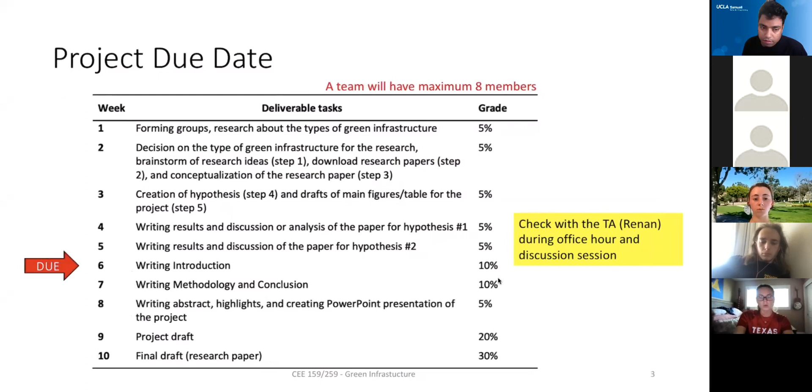All right, midterms is next week Thursday. We release it during class - there is no class, meaning you can take the midterm during class time if you want, but you can also take it Friday since it's not due until Friday midnight. Once released, you have all the time to work on it, but that doesn't mean I expect you to take that long. The exam is set for a 3 hour maximum - you just need a 3 hour window to work on it.

Example midterm - I released that last class. Check out the questions so you know what kind to expect, and we'll solve those on next Thursday for understanding. Usually everybody does well on short questions since you've taken the quiz and know the concepts. The questions you may have difficulty with are the mass balance ones, because they ask the same question a different way - you just have to know what is input and output. That's why you should solve more examples; check those two questions on the midterm to get some idea.

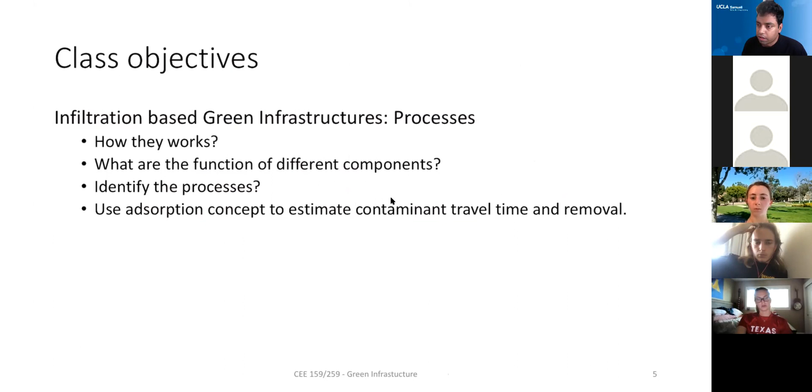This is also one of the most popular green infrastructure designs, either called rain gardens, bioinfiltration systems, or bioretention systems. These are called different names, but they all work in a similar process. Any green infrastructure where there is infiltration involves learning about the filter media.

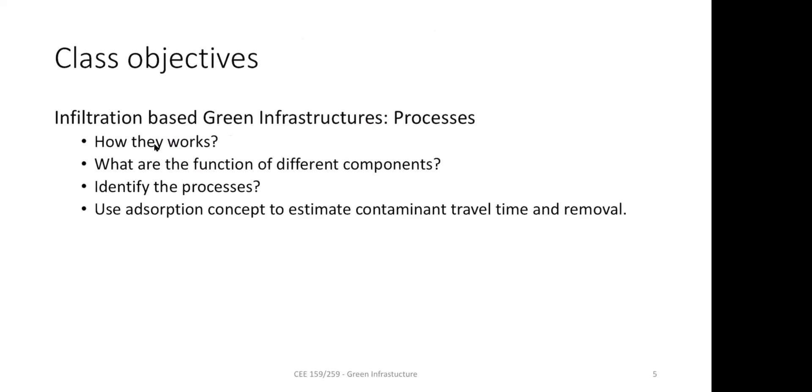Infiltration-based green infrastructures are very popular because they can remove pollutants more efficiently. But that doesn't mean you can apply infiltration-based green infrastructure everywhere. You cannot apply it where the soil itself doesn't have high infiltration, because it relies on water moving through the entire filter layer. That filtered water has to go somewhere. If the natural soil has no infiltration capacity, where will that water go? It has nowhere to go, meaning there will be no more infiltration once the soil is all soaked with water.

So infiltration-based green infrastructure requires soil with high K to recharge groundwater. If yes, then you apply it. If no, you use an under drain so you can discharge that water to the storm drain. But an under drain is expensive because you have to design extra infrastructure for it. Wherever you can't apply an under drain, you cannot use infiltration-based green infrastructure.

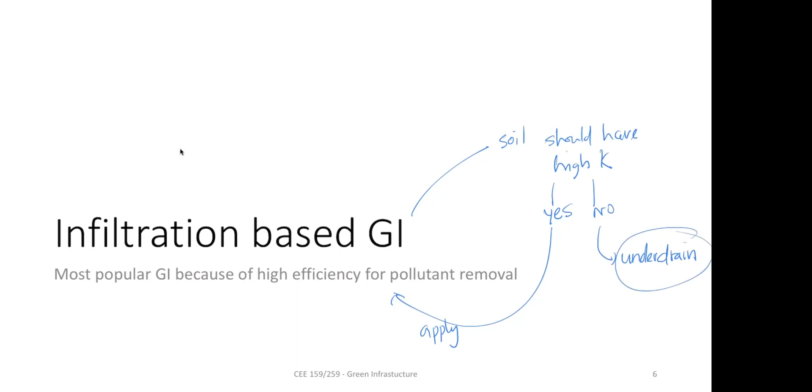So this is just one example: you replace the soil with some amount of filter media. Traditionally it's sand with a small fraction of compost. We use sand so water can infiltrate quickly, and compost is used to support plants above and also has some capacity to remove pollutants. At the very bottom, the arrow indicates infiltrated water getting into groundwater. But wherever the soil doesn't have that capacity, you create an under drain, and that water goes to a pipe somewhere you can easily discharge.

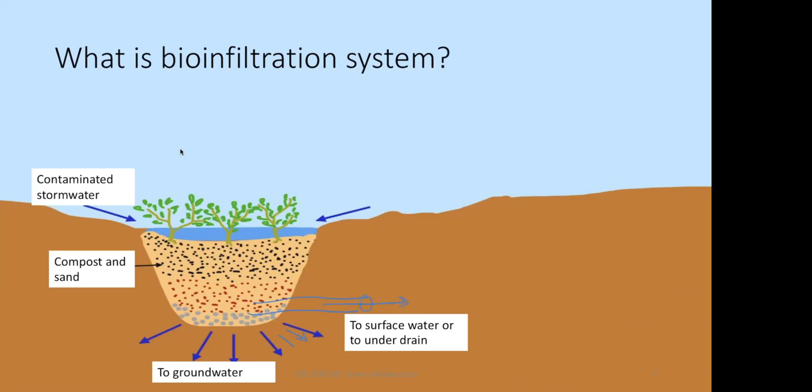One example is the rain garden—you can watch YouTube videos on how they design it. This is something you can do at a single family home. The reason is simple: you replace the soil with sand and compost, and add a liner if you don't want infiltration to occur inside the ground, or channel it elsewhere. Usually this is placed a little far from the home, because you don't want to destroy the foundation of your home—at least 5 to 10 feet far from the wall.

What usually happens is all the water that comes on the roof is channeled from the rooftop to these locations, so you don't have to irrigate. You can see this in many places—basically you can create your own garden this way.

There's another way you can check—structural systems on the roadside. You see locations with plants, like here. Water usually goes in, and there are tree boxes, but those aren't necessarily filled with that much filter media. For instance, water goes in here, and in other locations there are curb cuts so the water goes in. Many systems have these particular features.

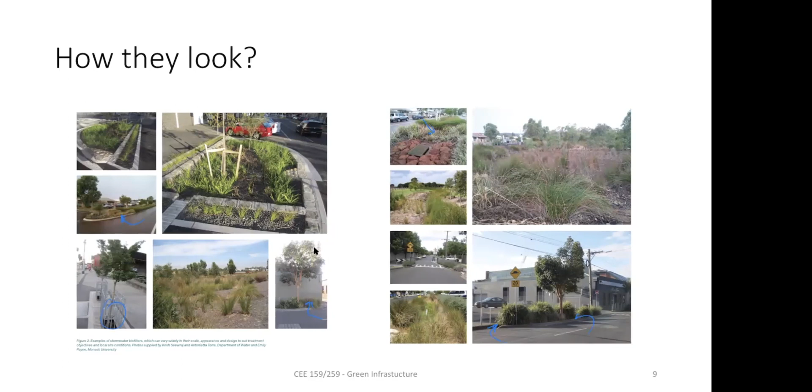But just from looking from above, you can't tell whether there's an under drain or not—90% of them don't have any under drain. That means it's assumed this is either for temporary retention of water if there's no infiltration capacity, or if there is infiltration capacity, the water gets into the ground. There are different design components you can design, but these are the four things you have to think of.

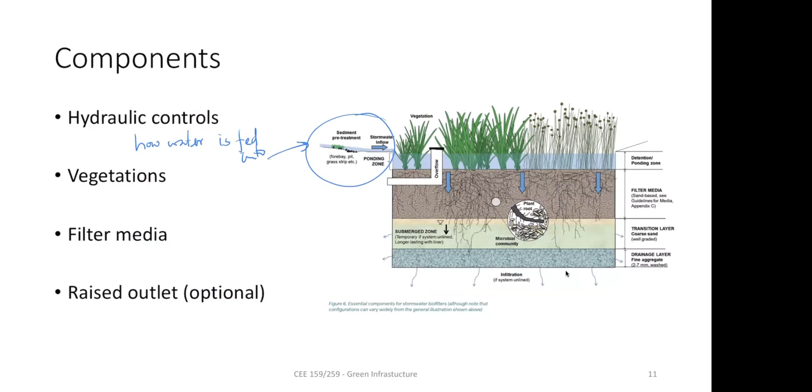Very first one is hydraulic control. Hydraulic control means how you channel all the water into the rain garden. Think of how water moves. So how water is fed into the system. There are a couple of things you can change - you can see there are some grass strips or some rocks. The idea of having those things is to slow down the water speed. Why do you need to slow down the speed? Because you want to use them as a sediment trap.

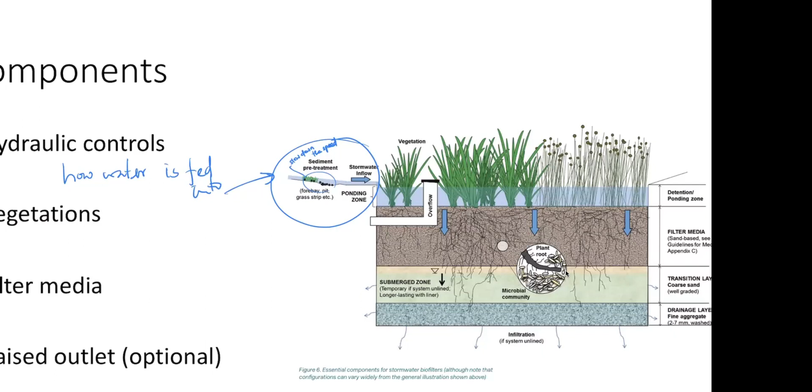If you don't use them, all the sediments will get into this bioinfiltration system and it will clog the system. So that's why there is a sediment pre-treatment. And this also slows down the water, which means you have less erosion of the actual bioinfiltration system place. So that's hydraulic control. The second is vegetation.

So that's one, the next one is vegetation - basically plant uptake of pollutants. There are different reasons for why you need vegetation. First is plant uptake. Number two, those plants are also helpful to prevent erosion of the soil filter media itself, because if you have plants with roots, they hold onto that soil strongly. So whenever there's a water flow, it doesn't erode. So that's prevent erosion.

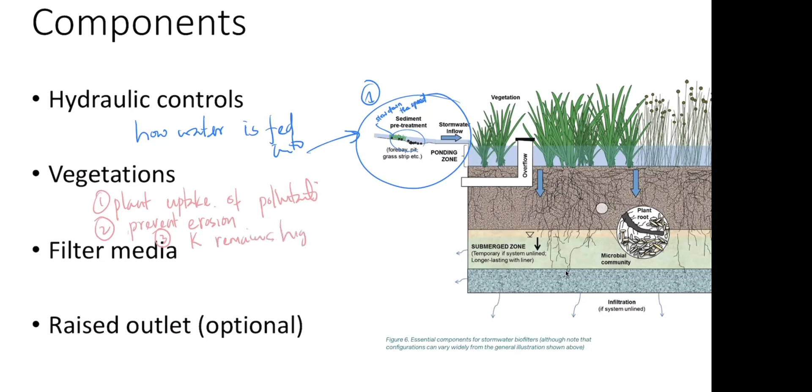And then the third benefit is if you have plants, they also increase the infiltration capacity of the soil. Because if you see these roots, the roots die and new roots grow. Everywhere there are root channels, they create a flow path - it's like a highly permeable layer where water can move through wherever roots were. So hydraulic conductivity remains high if you have plants.

The third one, which is the filter media, is this one - this is three. Filter media is the heart of this design, where you remove most of the pollutants. Usually, their goal is to increase infiltration, because you want water to move as soon as possible so that it doesn't pond. Usually within 48 hours - you don't want ponding for more than 48 hours. Number two, the goal is to remove pollutants. So this is where you can mix different amounts of materials so that you can remove pollutants.

The fourth one, which is how you let the stormwater go out of the system, is a raised outlet. Usually in this case, things are moving through infiltration or exfiltration if it's the side. But sometimes you have a liner that prevents any kind of water going in, but you can have a raised outlet - basically there is a pipe that you can raise all the way up so that water exits the system a little bit higher than the bottom place. What it does is it creates this submerged zone. The reason is that outlet is up to here.

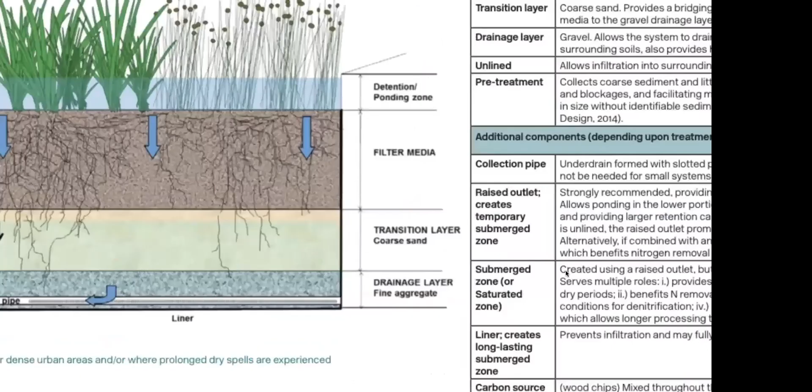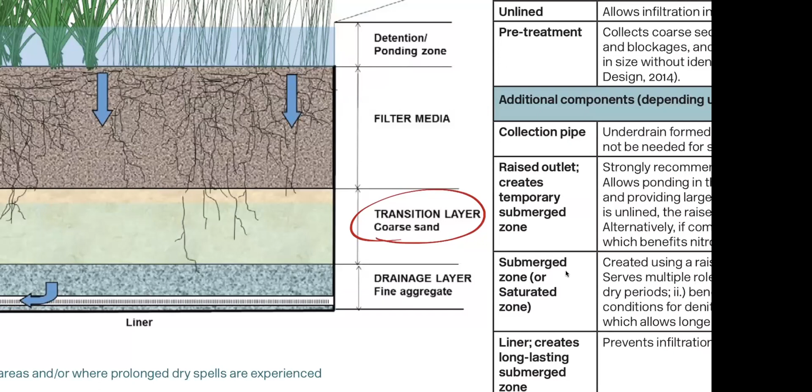For instance, something I didn't discuss is the transition layer, which is basically coarse sand, because you want to put the filter media and you don't want the filter media to wash out of the system. So you put a sand layer whose goal is just letting water move as quickly as possible away from the filter media without having the filter media pass through the system. And then we have the drainage layer, whose goal is just to install the pipe and make sure there are big gravels there so that there is no resistance for water to flow. So usually you put gravels, and sometimes there are some fine aggregates too.

Again, why we use this kind of system, why it is popular, there are many reasons. Number one, it requires less space, because you can treat a lot of water vertically. You don't have to have very wide areas. And space is limited in most urban areas.

So that's why this is something preferred. And this is also attractive landscape design. You have plants, you can put a lot of different plants, so it looks good. And it has a lot of flexible design. There are so many things you can control. You can add different filter media. You can do all those other things.

This also requires maintenance a little bit, but if you're at home, it's as less as garden maintenance. And it creates other ecosystem habitats, so that means it provides some more value. Just know that if you have a rain garden and it doesn't drain quickly, it creates mosquitoes. So that's one thing you have to think of when you design this. When it starts clogging, that's the time you have to remove the top layer.

So again, it has many different design things that we discussed. And we discussed physical, chemical, biological processes earlier in this class. I'm just going to highlight which are important here now. So as I said, there are many processes here - physical, chemical, biological processes.

If I ask you what kind of physical process happens here, the very first thing is any sediments can settle. That's the first process: sedimentation. Just the large particles settle there. Then the second process is the plant.

Because there are plants, those plants will uptake a lot of pollutants. So that's why plant uptake is mostly a biological process, right? So that's the second process. We are going from top to bottom.

Then the third one is in the filter media. This is basically adsorption - they can stick with the filter media. They can also degrade using the microbial community inside the root systems, or through degradation or other forms. So this is basically physical, both physiochemical or biological.

Another thing I can write is straining. We discussed this - straining means if your filter media size is very small, very fine particles can get filtered out because the pore sizes are so small they can't pass through. So straining is a physical process, adsorption is physical and chemical both, and degradation is a biological process. All these things can happen in that filter layer.

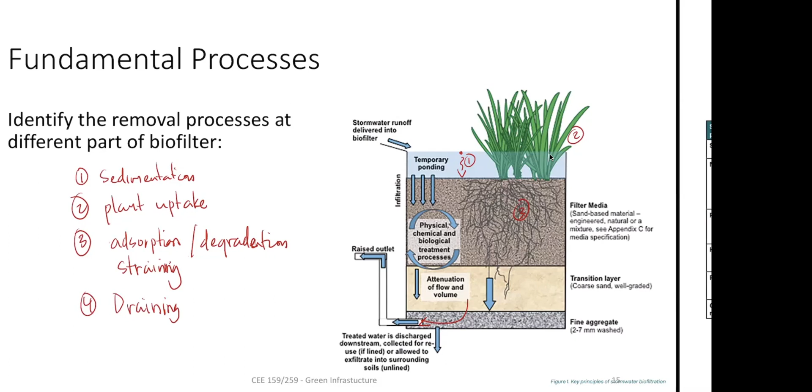Adsorption and degradation you already know to some extent. Straining, we already have those equations. So again, I'm just putting everything here so that you know which processes are relevant, and in these pictures I just put which processes are important for different types of pollutants.

For instance, nitrogen removal is done by many different processes - mostly it's a biological process. But if you have particulate nitrogen, which is leaves or decomposed materials, it has nitrogen, nutrients and carbon, and those can be removed by sedimentation. But once it's in dissolved form, it's mostly a biological process.

Phosphorus is very easy to precipitate, so it's mostly written as phosphate. Nitrogen is mostly nitrate or ammonium - there are many forms, but these two are the most common dissolved forms.

Then you also have organic nitrogen and organic phosphorus. Basically DNA is organic phosphorus because it has phosphate, but it's organic because it's part of organic molecules. And you also have particulate nitrogen or total nitrogen. So these different forms can be removed in different ways.

Phosphorus, as I said, has a 3-minus charge, so it's very easy to adsorb into substances - that's why adsorption is much more important here. By the way, these are all ranked from higher to lower importance - this is most important, and the next is less important.

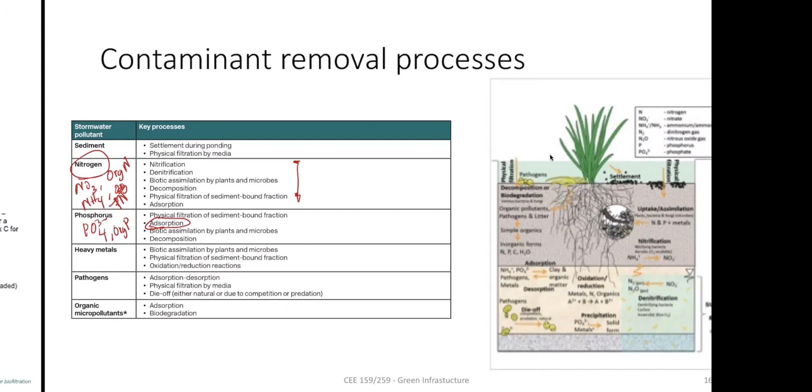So when you design this, you should think of all that. In your projects, this is something you will think of.

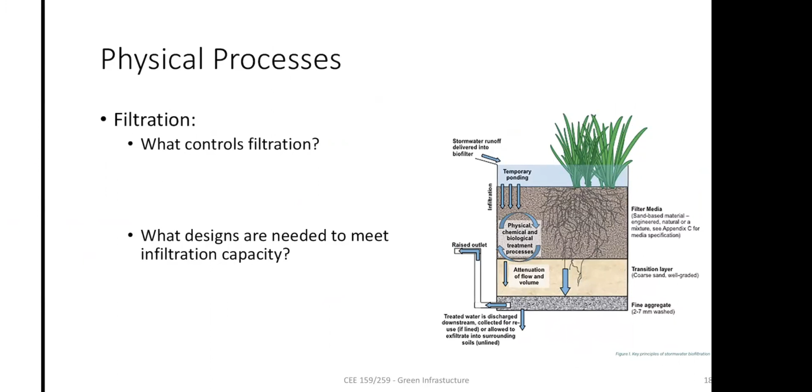Physical process - we discussed this already, so I don't need to write it, but I want to talk a little about the design to control this process. How do you control filtration? Filtration, or infiltration, means removing large particles by straining - like filtering particulate substances from things.

So usually you design and control that by particle or grain size. If you have filter media with big particles, those big particles will most likely be filtered out. But if you have very small particles, they will come out here. This gets blocked. So particle size is one way to control it.

If you think of infiltration, how quickly water needs to move - the standard design is you should aim for 10 inches per hour, or roughly 25.4 centimeters per hour. Definitely around 5 inches minimum - so it's 5 to 10 inches per hour. That's the infiltration rate you have to use.

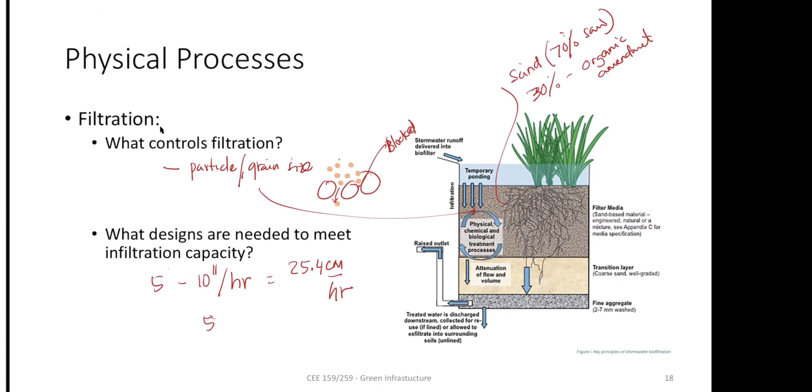Just know the reason for sand is increasing hydraulic conductivity, which is a physical process. The reason you don't want to use smaller particles is because they start clogging due to filtration and removal of fine particulates.

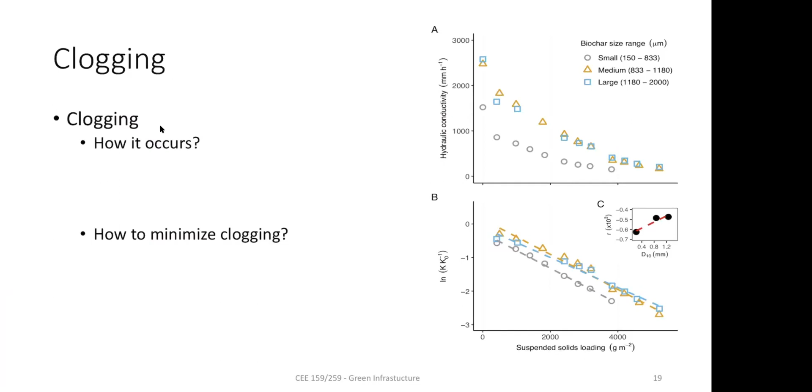This y-axis graph you see is from a study done in our own lab, where one of the master students packed sand with different amounts and sizes of biochar. If you add biochar with different sizes, it will clog faster depending on the size. So we just measured the hydraulic conductivity - initially it's very high, like for instance here, and when you use large biochar, it decreases at a certain rate.

The reason for the decrease is because they are adding a lot of suspended sediment in stormwater. So if you calculate how much suspended sediment is present in stormwater based on the volume being added or infiltrated into the system, you can calculate how much sediment has already been added to the system.

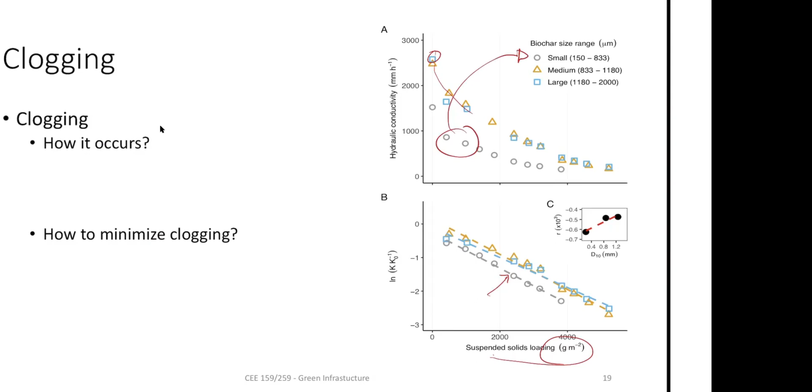Those sediments will start clogging the pores, that's why the hydraulic conductivity decreased. So what she did is predict that change in hydraulic conductivity with initial hydraulic conductivity by just knowing the size of the filter media. This line is below the other lines, meaning it clogged much faster, because this is a low hydraulic conductivity corresponding to the small biochar. What you learn here is that if you apply very small size of biochar or sand, it clogs much faster and the hydraulic conductivity is very low. That's the reason a lot of times people apply large particle size.

So now the question is how you're going to minimize clogging. You can minimize clogging by adding different amounts of large size biochar or large size amendment, or you can scrape some of the sediments that accumulate on the surface, because usually it clogs on the very top surface before it even goes down.

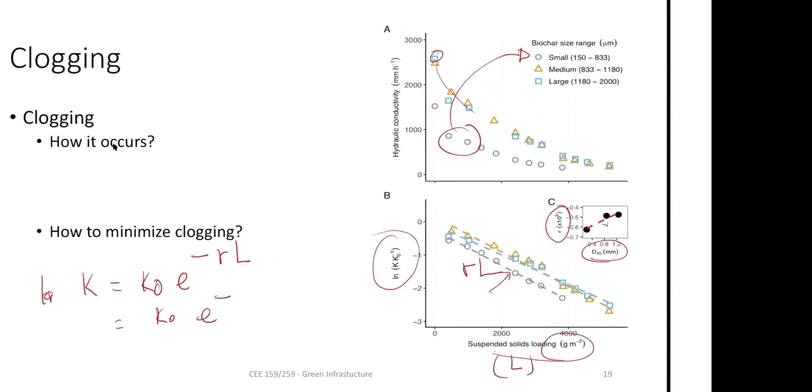In this equation, the y-axis is this. So if you use that linear equation, you'll get k equal to k0 e to the power minus whatever the sediment loading rate—let's say sediment loading rate is L. The slope is R, so that gives RL. This R is a function of the smallest size, or D10, meaning 10% passing, the small size range of the filter media. So what he found is K0 e to the power minus the slope, which is R equal to alpha times D10 times L.

So why is this important? It says that if you use any kind of filter media, if you know the initial hydraulic conductivity, you can predict how long before it starts falling, reaching a certain value where it will not infiltrate enough water for you. This is based on the D10 of the filter media you packed, and the amount of sediment loading that accumulates in the system, which is basically the stormwater property. So this is stormwater characteristic and this is filter media.

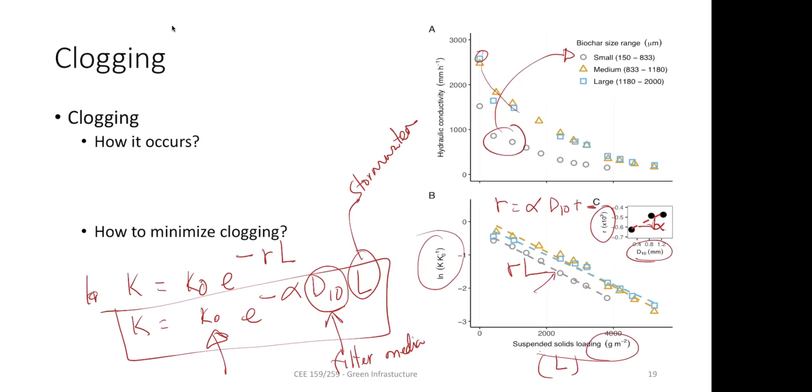Professor, what is alpha in that equation? So alpha is the slope here—it just means this R value is alpha times D10. There's some other value here too, but this is just the equation. By the way, this is just one equation you can use to predict clogging in the real world, if you know the parameters.

Professor, I just wanted to confirm with you—the midterm itself, we technically have all 24 hours, but you expect it wouldn't take longer than 3 hours, though we have the 24 hours if we need it? Yeah. And I don't set a time limit like the quiz, where once you open it you have a certain number of hours. But for this midterm, I don't set that limit.

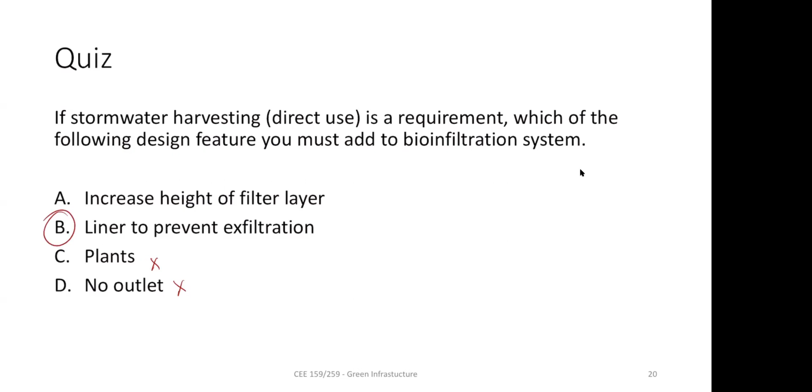You do not have that water to reuse. Okay, that's good. One more question.

Okay, you have about 20 more seconds to answer.

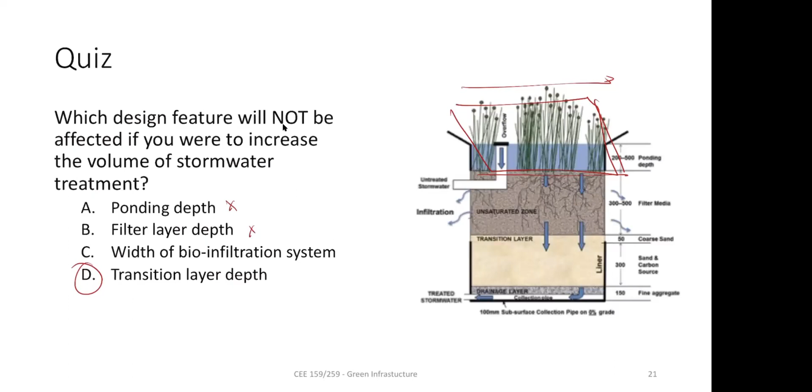What it says is if your stormwater has a certain pollutant concentration, after it adsorbs - let's say this is C0, the initial concentration. Imagine this is a filter; I'm creating a mass balance. This is the filter media and your stormwater is coming in at C0. As it moves through the system, it becomes adsorbed.

When it adsorbs, the remaining amount of pollutants will leave the system - that's C, the effluent concentration. That means it's after adsorption occurs. So this is the concentration in the effluent.

Something happened here - concentration in effluent. I'm talking about contaminant concentrations. So the question is how much of that, because your goal is to make C as small as possible. The only way you can decrease it is by having more pollutant adsorb onto the system.

So how do you know the adsorption capacity? That's basically KD. KD means if you have a certain concentration in the stormwater, the amount of pollutant that can adsorb onto that filter media is the adsorbed concentration. Q is basically the mass of pollutant adsorbed divided by the mass of filter media.

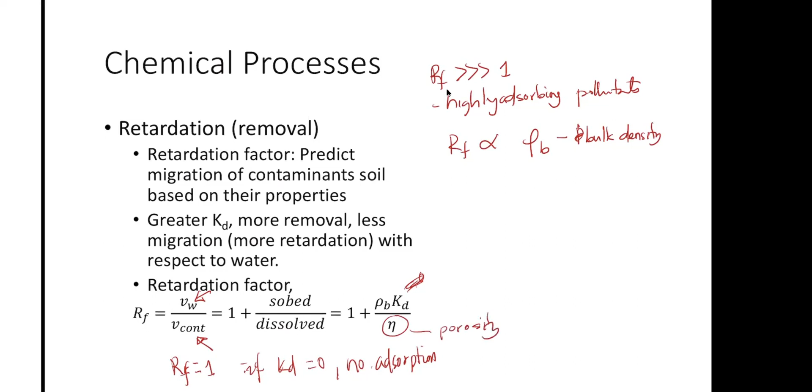Porosity depends on the type of filter media you add. If you add smaller size particles, that has low porosity, and low porosity means it has more retardation factor. But these are hydraulic controls. Bulk density or porosity just controls how slowly water moves through the system. KD is more about reactivity.

So rho B and porosity are more about hydraulic control, meaning how slowly water moves through the system, because if it moves slowly, it has more time to react or remove the pollutants. And KD is basically reaction control.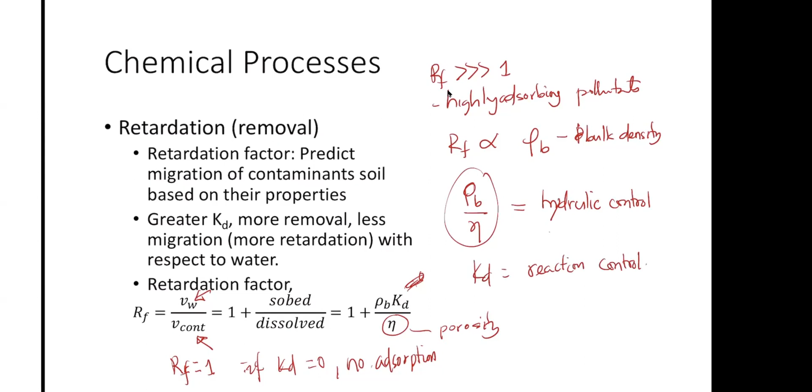By using those two, you can change the retardation factor more. So just know the equations, that way you can find out. I already discussed the bulk density and everything, so you know those values.

Design considerations: you can increase bulk density by compaction, but if you increase compaction, hydraulic conductivity decreases, and porosity decreases. By doing both, you could increase Rf, but you are also compromising the infiltration capacity.

Adsorption capacity basically increases KD, and the only way you can do that is by adding more FOC, meaning adding organic filter media. Examples would be mulch, compost, biochar, activated carbons—all those things you can add.

This fraction of organic carbon is important if it is organic pollutants. Not every pollutant requires organic carbon. Some pollutants, like certain metals, aren't really affected by organic carbon that much. They have binding sites—for instance, removal of phosphate has nothing to do with organic carbon. They don't bind that well to organic matter, to some extent, but not that much.

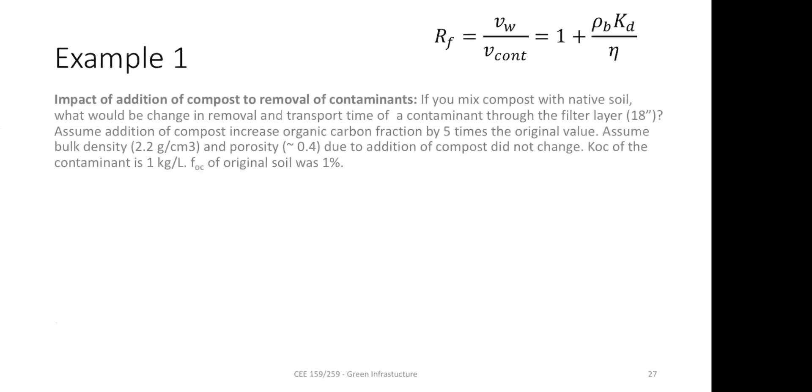All right, so we'll get back to this example at the end so that you know why it is important for the design.

What we learned so far is that if pollutants move in water through the biofiltration system, it can be adsorbed on the filter media, and there are equations that can predict the removal capacity or how much concentration will be at the end. But there are biological processes which are very slow, and those biological processes are also important for long-term degradation of pollutants that are already absorbed, because if you continue to absorb a lot of pollutants and they don't go anywhere, it will accumulate.

Then the whole system becomes a source, so you don't want that. That's why you have to make this biological system very active so that they can decompose those pollutants, particularly organic pollutants, and nutrients, which they will use as food. That's the reason you see those plants are there.

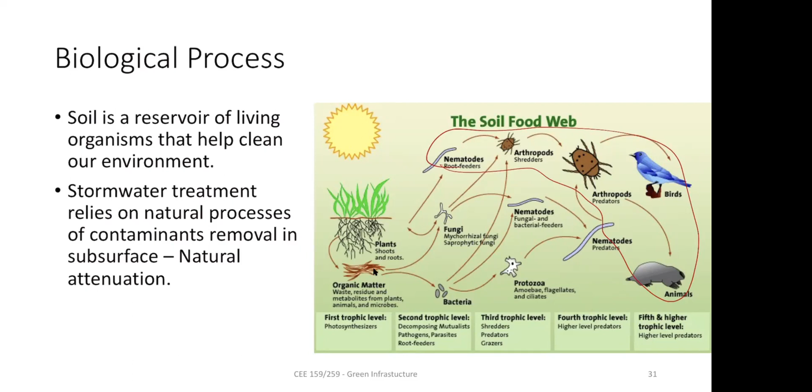You also add lots of organic carbon, because those organic matters release nutrients as well as carbon, which is a source of food for bacteria, fungi, and other higher organisms. They can also support larger biodiversity—for instance, it helps earthworms to grow, and earthworms can be eaten by other organisms, and then you have all these higher organisms supporting the food chain.

So the biological process—mostly what stormwater treatment or engineers focus on—is the plant. What kind of plants you will use, how to design those systems such that plants can actively take up pollutants, and what kind of soil mix you should have so that there will be more microorganisms that can degrade the pollutants, particularly fungi.

This is something newer—before, people didn't really use fungi for any purpose. This is still new for the stormwater angle, so now more and more people are thinking of how to grow more fungi in the systems. Bacteria are naturally there as microorganisms; you just give them more food, like compost, so that they can survive.

So there are some design considerations you have to think about. The very first one is that any biological system requires water. If you design it such a way that all the water moves very quickly with no water holding capacity, it will become very dry. And if it's a dry soil or dry filter media, no organism will survive for long. So the very first thing you want is water holding capacity.

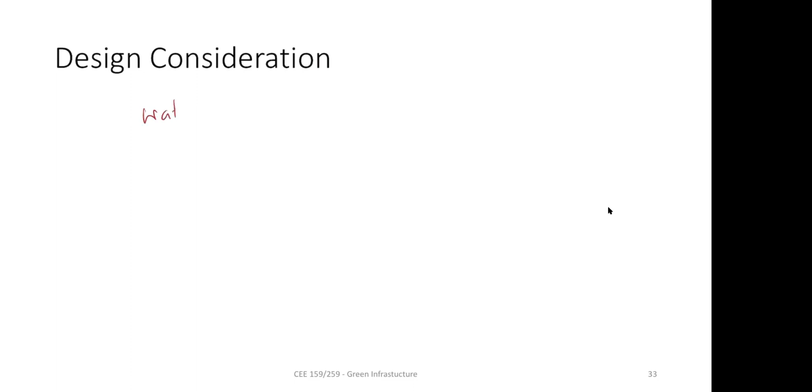Water holding capacity is related to the capillary action of the filter media. Capillary means if you have a very tiny tube and you put it in water, the water will rise. That means in the pores, water will hold in the small gaps between the fine particles.

That capillary action is very important because it holds the water and prevents it from draining due to gravity. And if that happens, those waters are there for plants and organisms to survive. So the way to control this is particle size.

You do not want to add too much sand. If you add too much sand, it will drain very easily. So to increase water holding capacity, people add compost. Compost soaks a lot of water and keeps it there. So compost is one way. You can also add biochar because biochar is very porous and holds that water for long.

And then there are other materials. Basically, you decrease the particle size. If you decrease particle size, water holding capacity increases. So that's the very first consideration. And the second is basically nutrients.

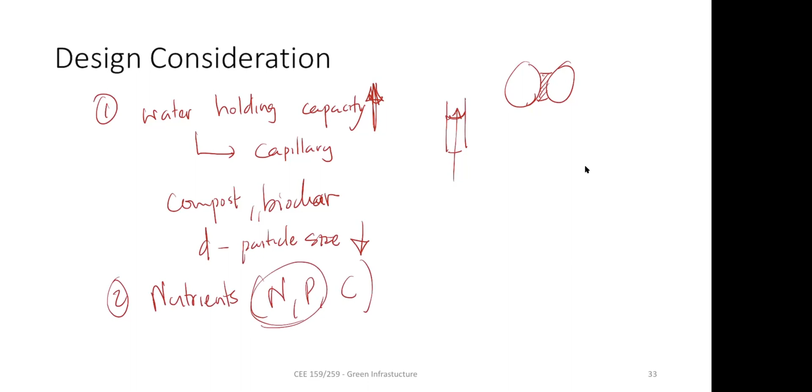You've got to supply nutrients for those organisms, and usually those nutrients mean nitrogen, phosphorus, carbon. But nitrogen and phosphorus are pollutants in stormwater itself, so you don't want to add a lot of those because they're naturally present in stormwater — you want them removed from the system. So what you do is add a lot of carbon. Carbon-rich media creates an NP limiting condition. If it is NP limiting, that means any microorganism that grows is starving for nitrogen and phosphorus, so they will take it from the stormwater.

The third one is stress management. What kind of different stress could happen in the stormwater treatment system? Number one, you have climate stress — you don't want things to be too dry or too wet. You also don't want it to be too saturated. That's another thing you have to maintain. If it's too saturated, then some bacteria will not survive because there's no oxygen.

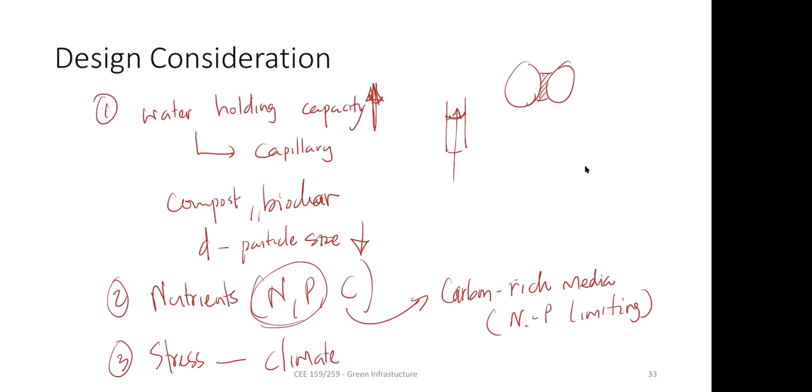Climate is one of the things. Another is compaction. If you compact the soil a lot, it's going to decrease infiltration and it will also affect the microorganisms. After compost, it says biochar — yes, let me write this one.

So you want to decrease compaction and avoid things being too dried out. The third stress factor is the pollutant itself. If you have too much pollutants, it will be toxic to microorganisms. But these systems are designed to accumulate pollutants, so you also have to find a way to degrade them quickly so they don't create some kind of negative effect.

For instance, antibiotic resistance can develop in the system, because what you're doing is creating a system where all the natural microorganisms accumulate. In the same place you also have antibiotics, metals, and other harmful pollutants. So these bacteria get stressed very easily, and when stressed they develop resistance — and that's actually another type of pollutant. So you've got to think of those kinds of things.

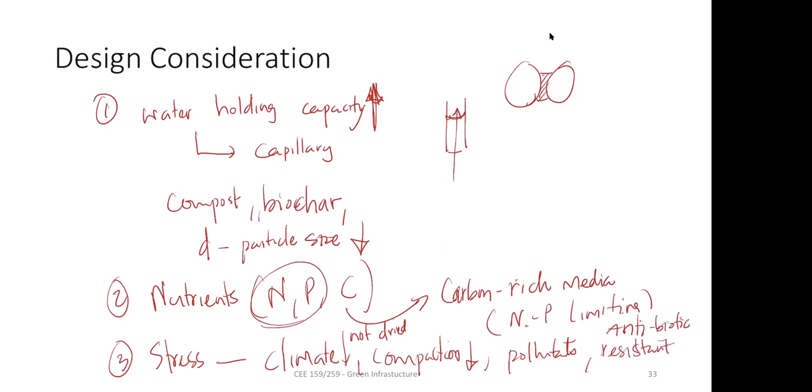Antibiotic resistance — these are things that can also be part of the stress.

All right, so let's see what we learned. If you want to increase nitrate removal, which layer should you increase? Ponding, filter, transition, or drainage? So just to give context, nitrate is not removed by filtration or adsorption directly. It requires you to have a saturated and submerged layer.

The way it is written can be confusing because I see how you are responding. Obviously, the filter layer will remove some through root uptake, but during stormwater treatment, it's not going to remove a lot. The reason is nitrate uptake is a very slow process.

It takes a long time for nitrate to be removed, so the filter media layer doesn't remove much. It's only removed by biological process, and biological process requires that submerged layer. So whatever layers create that submerged layer is what you want to do.

This is a confusing question, that's why I'm going to end the poll, but I'll share the result. This is what you guys chose.

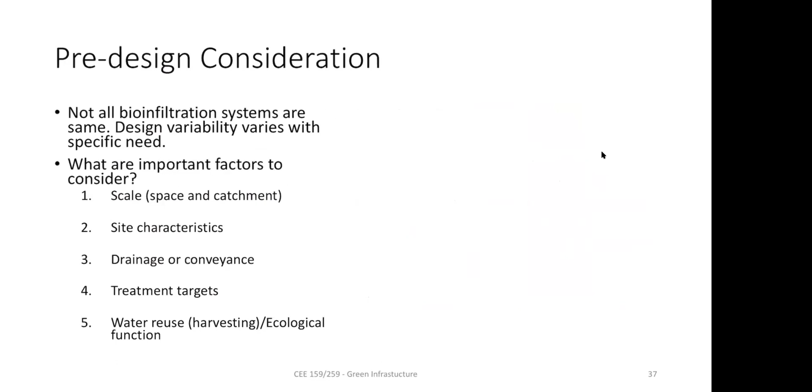The very first thing you want to do is scale - how big this should be - and that depends on multiple factors, but the most important is the storm event, because you are going to collect water. So you think about how much runoff you are going to receive. That's Q, runoff volume, which you calculate using the Rational Method, the CIA formula, that's more important now. This is something you have to account for, what's the size of the catchment, all those factors.

So that means this scale depends on a function of runoff coefficient and area of the catchment.

Then the second thing is site characteristics - what are the infiltrations, what's the soil type. So those are the things: soil type, climate, because these things will affect what kind of design you'll have - infiltration or exfiltration, or other factors.

And the third one is drainage or conveyance, meaning how you are going to have the outlet. So this is mostly about the outlet. Now the question is, what are the two choices for the outlet? Either you will not have any outlet, so all the stormwater goes into the ground by direct infiltration - that only occurs if the native soil is highly permeable. Or you will have an outlet if the soil itself doesn't have much capacity, so that you can treat the water and discharge it elsewhere.

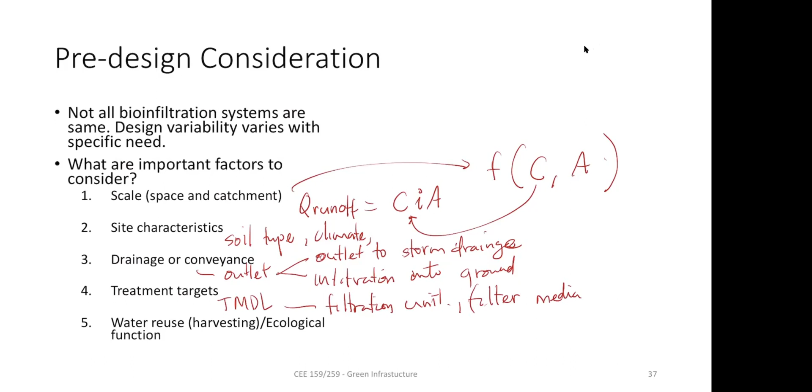So how big this should be is based on the design storm. That's where you're looking at - is this a 100-year storm or a 20-year storm, and what kind of storm event? The design storm, in this case in Los Angeles, you are looking for the 85th percentile, so that means the 85th percentile, 100-year, 24-hour storm.

If you take the 100-year storm event for 24 hours, you'll see different intensity distributions. You are looking for the maximum intensity that captures 85% of the storm happening in that period - that's the 85th percentile. Some places just give you intensity, like design for this 2-inch rainfall for 24 hours, or 1-inch rainfall for this many hours. That's how you will design it.

For catchment area, if you have a bigger catchment area, you need bigger infiltration capacity or a bigger system so you can collect that much stormwater - if this increases, your size would increase. If the rainfall intensity increases, the size of the treatment system would increase. Then there's performance objective, meaning whether you are removing pollutants or not. These are basically your design parameters - depth, filter media depth, width, all that stuff.

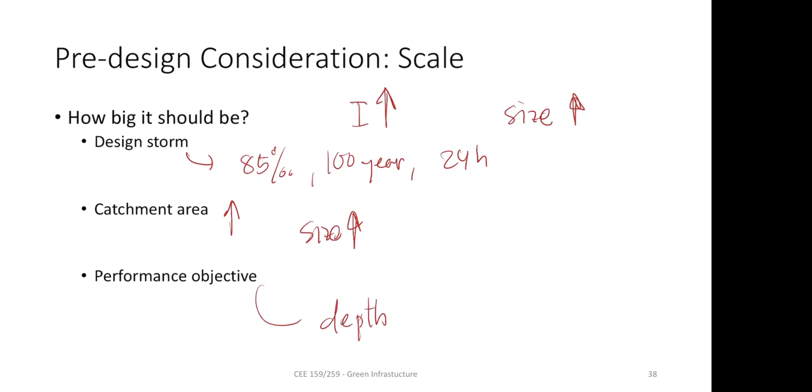So there are some other things you have to think of, like soil properties. The reason is soil itself will determine the infiltration capacity. So the very first thing you are looking for is what is the K value. K high means you don't have to have an under drain. If K is low, then this will determine whether you need infiltration or under drain, or a combination of both.

The second soil property is KD, because soil itself can remove some pollutants. So if the KD is high for the soil, you can mix some of the soil in the system.

The second important thing is groundwater. If you have shallow groundwater, and you are creating the stormwater treatment system, you are creating a pathway for pollutants to move to groundwater. So you don't want that. If it is shallow groundwater, what you do is add a liner to protect the groundwater. If it is deeper groundwater, you don't need to worry about protection.

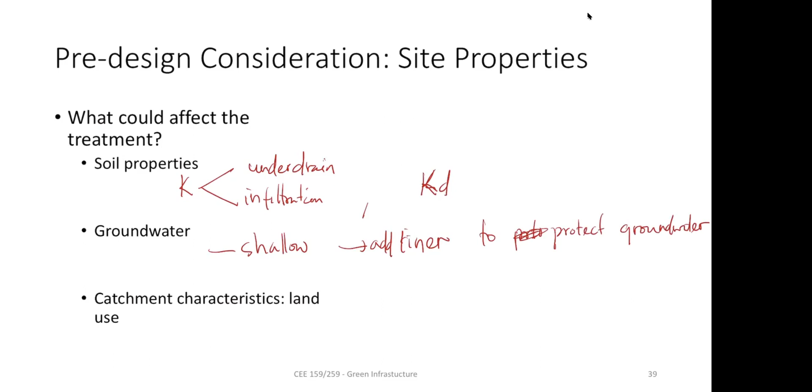Catchment characteristics will determine what kind of pollutants are in the system. If you know what kind of pollutants are in the system, then you know the source of pollutants, and then you know what kind of design you want to use. These are the things you will think of in your real project, so I put it here so you can start applying it.

So the last one is drainage. Drainage means how quickly you move the water away from the system after the treatment. The very first thing is it is going to have overflow. So basically, if you have a system like this, stormwater comes in, and it will go out like this. So this is overflow.

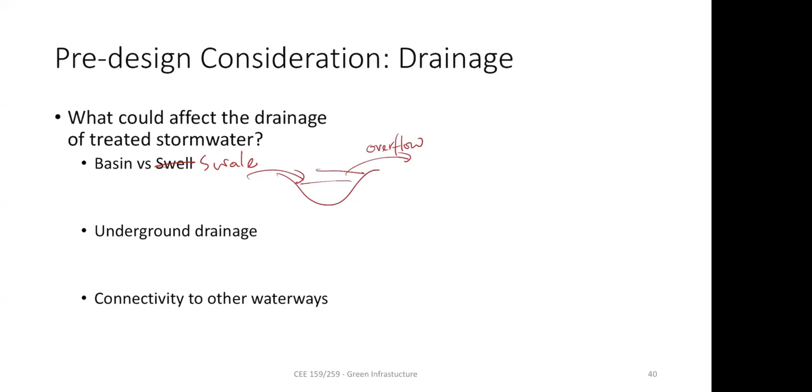And that depends on how much. If you are accounting for overflow, then you can design a certain way - you don't need that deeper layer, under drain, all those things. But if you need to capture and actually use it, so this is basically slowing stormwater and decreasing the peak flow. That means you are mostly doing flood control.

But if you have underground drainage, that means you are actually channeling some of the water from above ground. So this is also flood control - flood control plus harvesting. Because what if your area has such a small amount of water that you actually want to capture it and use it later? So underground drainage will help you connect that water to an underground tank.

This is mostly in Los Angeles or other dry areas where you want to harvest water. So this is usually for dry areas. Then also there's connectivity to other waterways.

Hold on, give me a second. Let me come back for a second. I smell something burning.

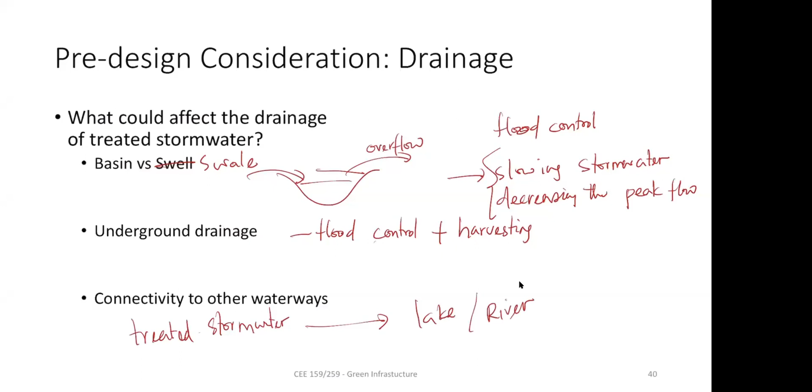So connectivity to other waterways means, if you want to discharge that water, stormwater, once it's treated, you want to discharge it to, let's say, a lake or river. You want to ensure that these are placed in proper locations.

Another important consideration is contaminants. But you have to think that many places don't design this for contaminant removal. The reason is it's too expensive. Also, a lot of times they don't really require removal of some pollutants - what they do is just required to meet flood reduction goals, saying that 90% of the stormwater is going into ground. So pollutant removal is increasingly important because you want to harvest water and don't want pollutants to be there.

The last one is ecological units. Ecological unit means, let's say, you design the system so that you have biodiversity. If you put all these leaves and plants - in Los Angeles, you don't see lots of birds and native species if you don't have enough trees. So this is something we can bring back. Another aspect is heat island effect - if you add lots of plants, it will also help lower the temperature, something we didn't discuss. So that's also another ecological benefit you have to think of.

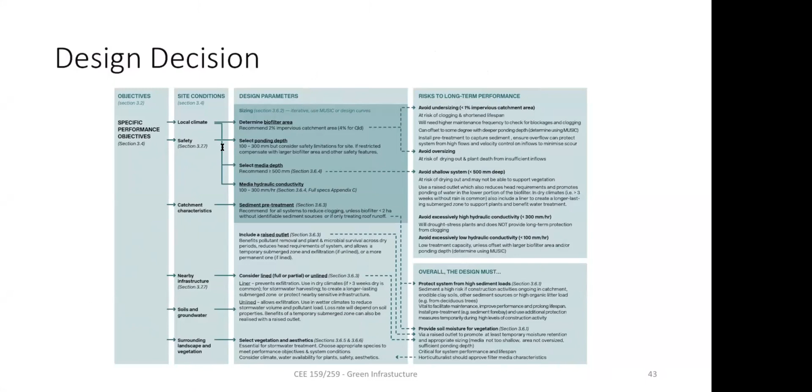First is size. That depends on how much stormwater you capture, which depends on Q equals CIA. Use this function to calculate the flow rate you'll receive at that location. Once you know this, you can design everything else: the width of the system, and the hydraulic conductivity of the filter media so that the entire flow rate will be treated. Also, what kind of plants you can put there so it has enough moisture.

Another design consideration is clogging. If you design something wider, you're less likely to clog the system, because sediment might accumulate in one location but will be treated in the next location. That's why you want to make the size a little bigger, but a lot of times that's not possible in urban areas because you don't have that much space. Then you have to maintain it more, which means scraping the surface. This shows all the design features and risks, so read those - they're helpful for your knowledge and for your project.

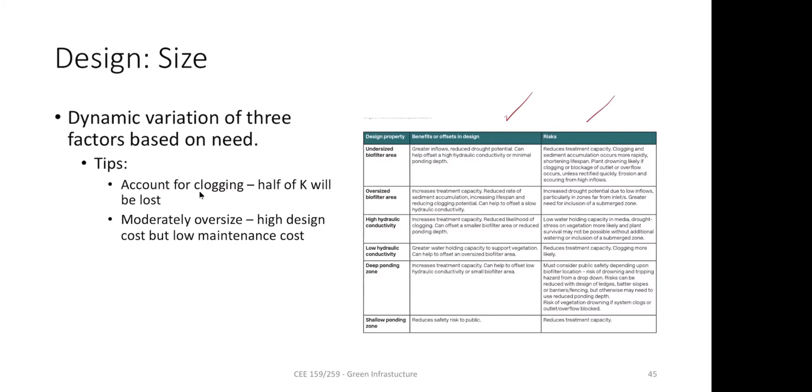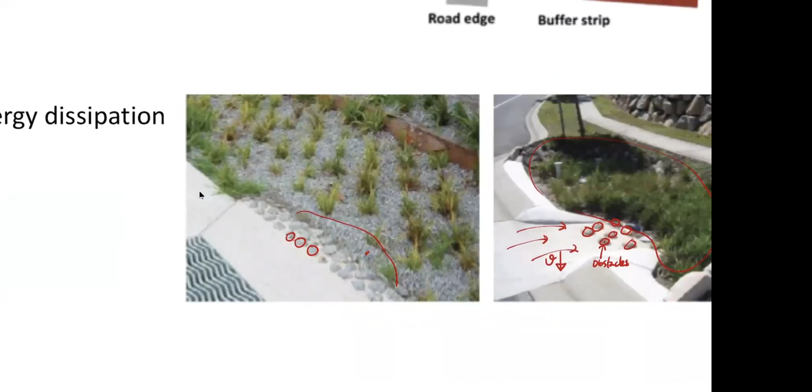Another example in the next picture - you see these rocks. This is basically slowing down the water flow. If it doesn't slow down, you'll get a hole here and erosion will happen in this corner. That's just what we discussed - I wanted to show how it looks in the real world.

The next thing - you don't want flooding to occur, so what you do is create conveyance. As you see here, this is the area where soil filtration happens, but the stormwater can get in through this channel. You can put some kind of screen so that it doesn't get clogged. That's just one way you see in most places.

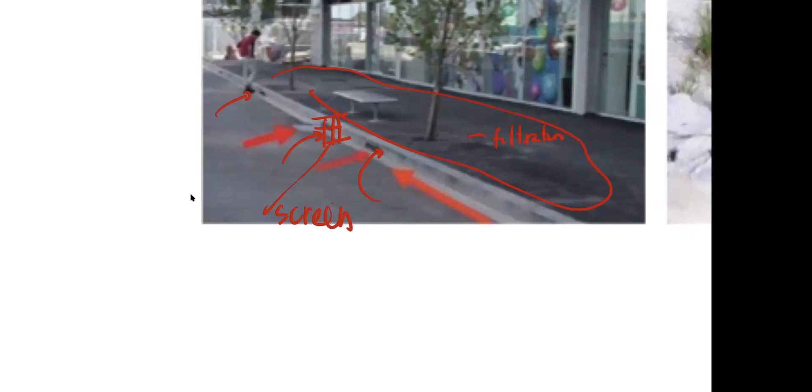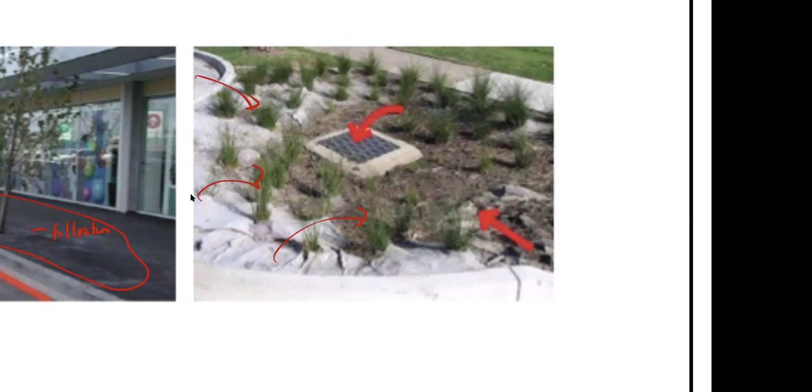Another thing you can see - if stormwater comes in from all angles and it becomes flooded, erosion will start because it will overflow somewhere else. So what you do is have some kind of pipe here - once the stormwater fills completely, all the stormwater will get into this area, meaning it's not going to flood the surrounding area. That's the whole reason you create a short circuit there - this is called bypass. All you're doing is protecting that surrounding area from overflowing.

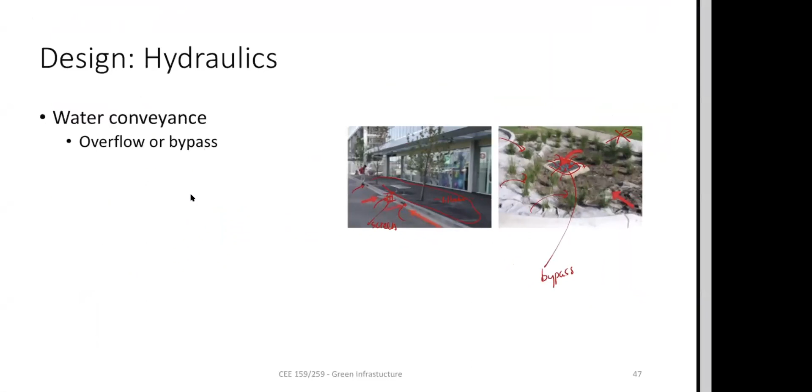The last one is raised outlet. The whole reason for a raised outlet is denitrification. Basically, you have a filter media and things are coming in here. If you do it like this, water comes out here and there's no submerged layer. But if you have a raised outlet - let me create an alternative - this is what you would do instead.

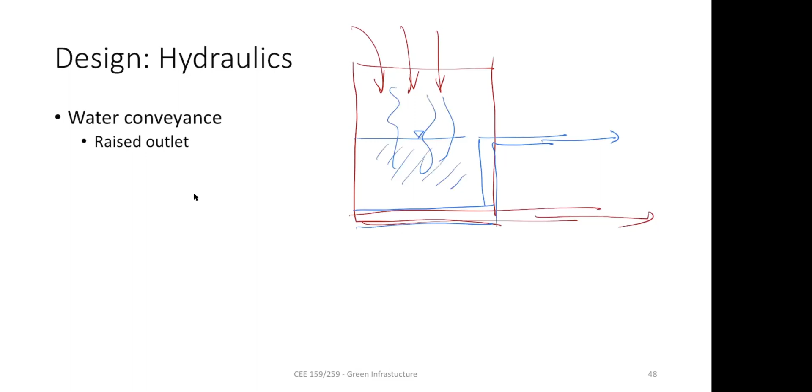So that means there will always be some amount of water inside it when it goes. Why is it helpful? First, it helps denitrification because it creates an anoxic layer. Second, which is very important in Los Angeles, it creates natural storage of water which will help the plants take that water later, so you don't have to irrigate. The root system will be healthy, with access to water, which is very helpful in dry conditions, dry locations.

This is where you save water, you don't lose it. You irrigate, and that water stays for the root to take later. You can see this in a pot you buy from Home Depot or elsewhere, indoor or outdoor. There's a small location where a little water comes out, but there's a storage location where they hold some water so the plants will not dry out quickly.

So second, raised outlet: number one, denitrification, it helps denitrification. Number two, it increases plant available water, so plants are healthier. The third one, because you are increasing the depth of water above it, you are also increasing infiltration, which is also good for recharge of groundwater. So these three benefits you get by having the raised outlet.

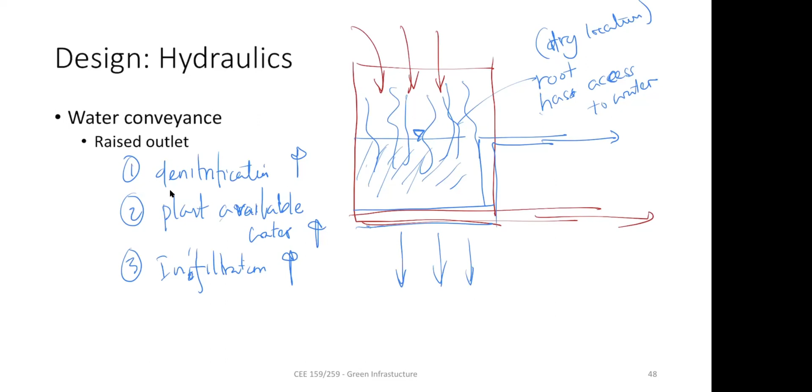The last one is hydraulic. Hydraulic means whether you are going to under-drain for removing water as quickly as possible, or for any other purpose. Here you can notice two things: this is the overflow that can go in, and then you have this perforated pipe so it can have infiltration. But here you have a raised outlet, which basically creates the submerged layer so you have denitrification.

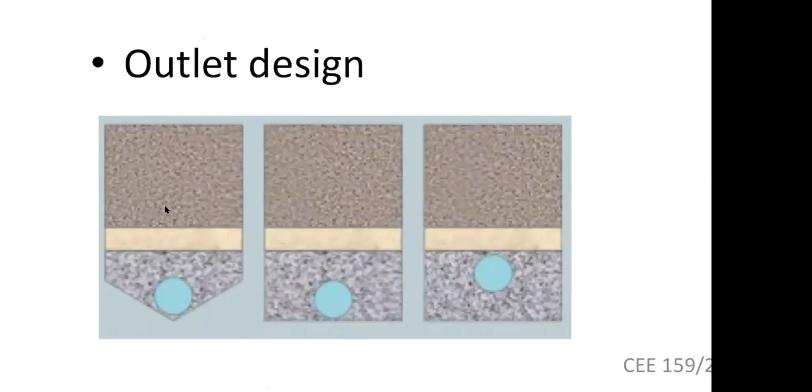In this place, the location of this pipe can vary, whether here or here, and also how it is designed. There are three different designs here. If you have this kind, it's just a pipe, water is coming out.

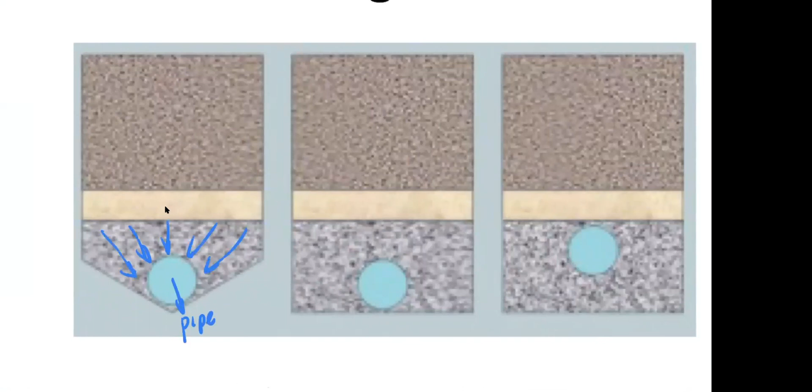With this design, you are collecting all the stormwater, so you are not holding any water there. This is good for collection, collection efficient. That means if you want to collect every bit of stormwater, this is the design you want.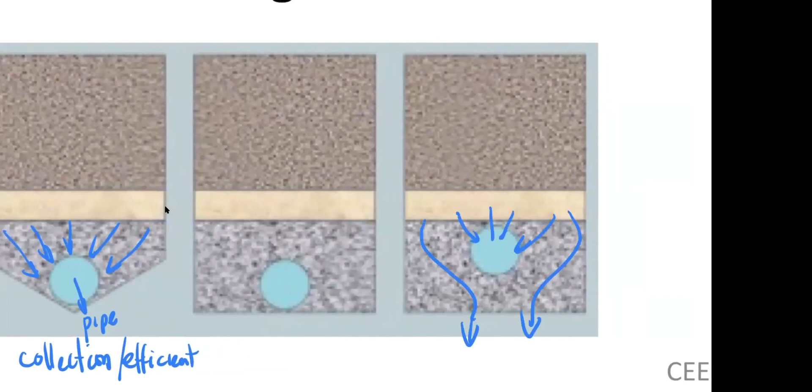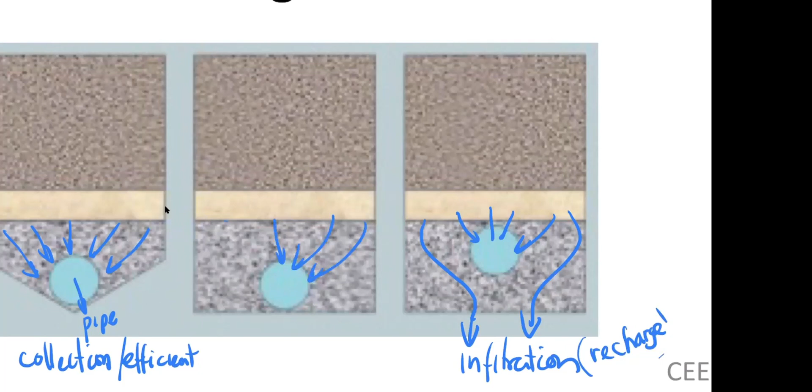But if you want to let some of the stormwater go, you create it here, so some stormwater will be captured but most will pass through for infiltration and recharge. If you want groundwater recharge as well as some collection, you do this design. You can also have an in-between design where you get some more capture but also some discharge.

Again, this is not important in terms of science, this is engineering design you can think about when you design.

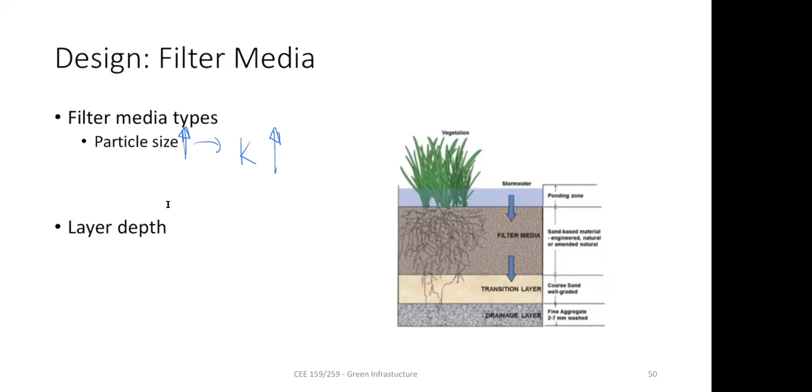The filter media particle size changes the K. If you have large gravel particles, the hydraulic conductivity is high. If the particle size is smaller, the hydraulic conductivity decreases; if particle size increases, K increases. If K increases, the water is moving so fast that the time pollutants stay in the system is low, or the time it takes for pollutants to be removed, or for plants and other processes to act, is very short, so pollutant removal efficiency will decrease.

So your hydraulic residence time would decrease, we call that HRT. If HRT decreases, you have less pollutant removal capacity. So what you do is increase the filter layer depth, this d. If you increase the filter layer depth, you have more chance for pollutants to stick with the soil. If you do that, indirectly HRT increases, and your pollutant removal increases.

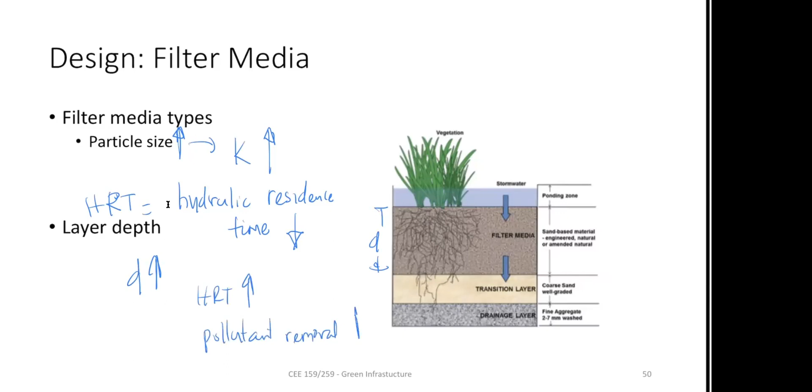Again, these are the things you can design. The last thing is there are 3 different filter media in that location. You have the top layer, which is the filter layer, filter media. The only goal here is to support plants and remove pollutants.

If you want to remove pollutants, you want to increase the FOC, fraction of organic carbon, or KD. You can also decrease the particle size, so that you have more adsorption, more surface area. These are a couple of things you can try.

For the transition layer, usually you use sand. The goal is to make sure the filter layer is not washed off and held there, and also allow the water to move as quickly as possible into the drainage layer. So you put sand there.

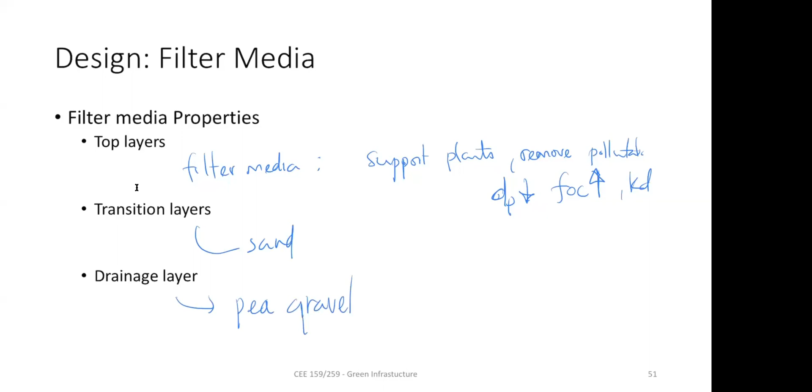And the drainage layer, your goal is to have zero resistance. All the water has to go out very quickly. So in this case, you are putting basically pea gravel, much bigger size than sand, so that it's there just as storage.

We have, I think, 2 more slides.

Vegetation is a few things. First, you need to know what kind of vegetation you want to add. The very first thing is you don't want to add any invasive species, because that will affect the location and you don't want to have a negative consequence. So always look for native species.

The advantage of native species is that they are acclimated with the climate. If you have a dry climate like Los Angeles and you put a plant from somewhere nice like New York, it's not going to survive. So you don't want to do that, it's also maybe invasive for these locations.

That's why you want to have drought resistant plants so that you don't have to irrigate a lot. And then you have to also have plants that have a deeper root system, because you want the root to penetrate much deeper.

That way you can remove pollutants. So your goal is to have deeper roots. Deeper roots means it can take water from very deep soil, so that means it can survive, and we can also remove pollutants.

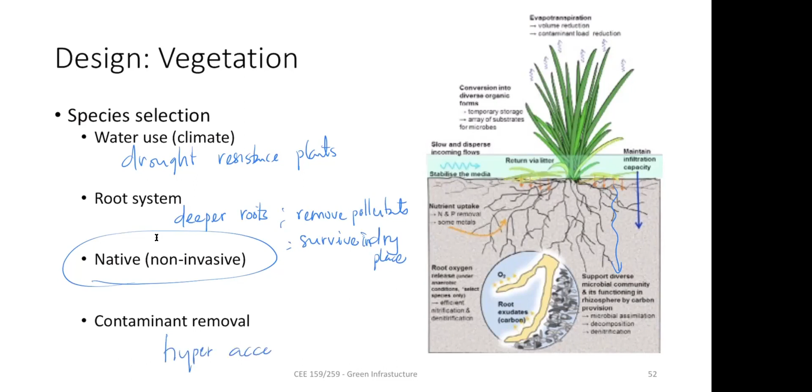Last thing is you can also put plants which can remove some pollutants like nitrate or heavy metals by themselves, basically hyperaccumulators, because not all plants can accumulate pollutants as much as needed. So you want to put those in.

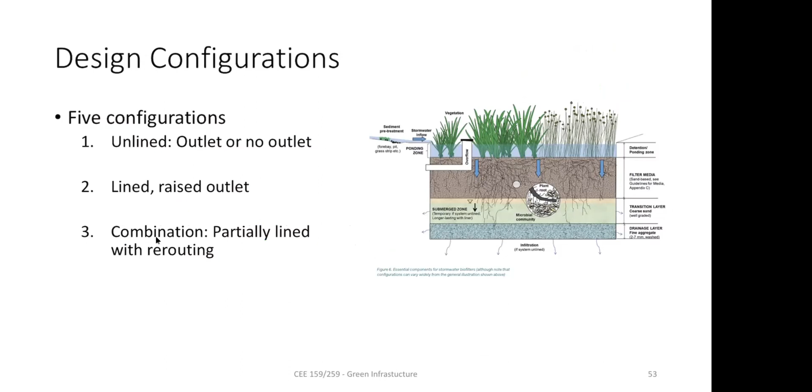As I said, we discussed this. You can put a liner, versus no liner. The only reason you want to put a liner is because you want to protect the groundwater. This is something we already discussed.

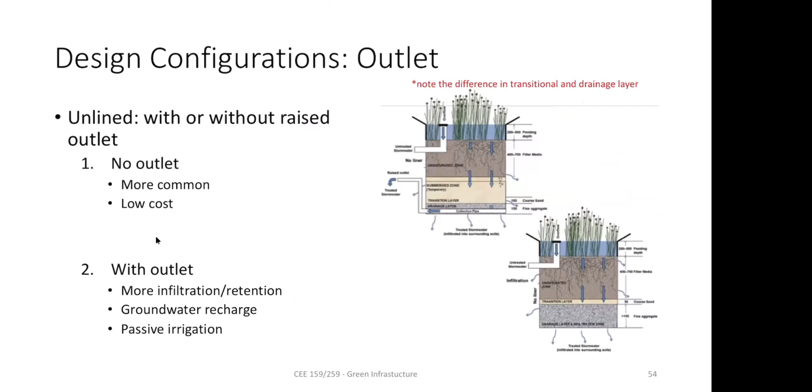The last thing is maintenance. The only maintenance we do is dealing with clogging, because once it's clogged, the system has failed. The only way to prevent this clogging is by putting in some kind of pre-treatment. If you can't do pre-treatment, you have to scrape the top surface, about a 1 inch layer which has accumulated sediments and fine particles, and then you can restore some hydraulic conductivity. But if you have plants, it does help a lot.